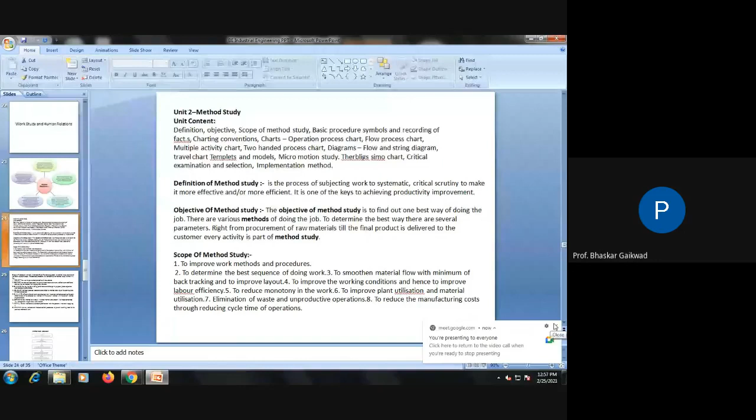Now unit number two. This is part of industrial engineering method study.

In this method study, the points contain definitions, objective, scope of method study, basic procedures, symbols, recordings, then charts. Different types of charts are there: operation process charts, flow process charts, multiple activity charts, and two diagrams - the flow diagram and string diagram. At the same time, there are travel charts, template models, and micro motion study.

In this micro motion study, Therbligs are the small activities shown by symbols, called Therbligs. The standard times for each motion are decided and shown on the SIMO charts. Then critical examination, selection and implementation of this method.

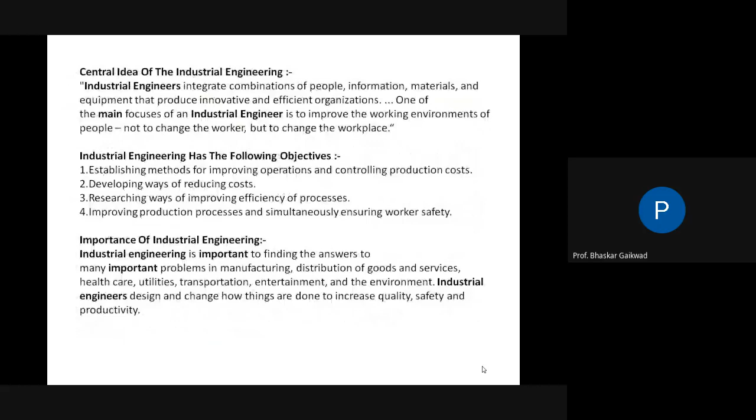So let us go through the revision of this, and then we will go to the next unit, that is method study. So in the last two, three lectures...

We have gone through the introduction to industrial engineering - what is actually industrial engineering, its definition, concept, the main objective of industrial engineering, and the contributions of F.W. Taylor and F. Gilbreth, scientists.

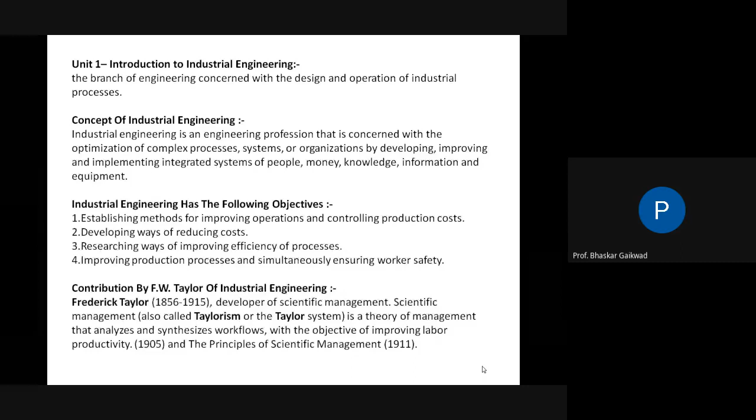If you consider all these points, this is related to improvement in production and productivity, and new development of the method study by reducing cost. So this is actually the core concept related to industrial engineering.

While developing this industrial engineering, two scientists, F. Gilbreth and F.W. Taylor, gave their contributions. F.W. Taylor's contribution is related to time study, and Gilbreth's is related to motion study.

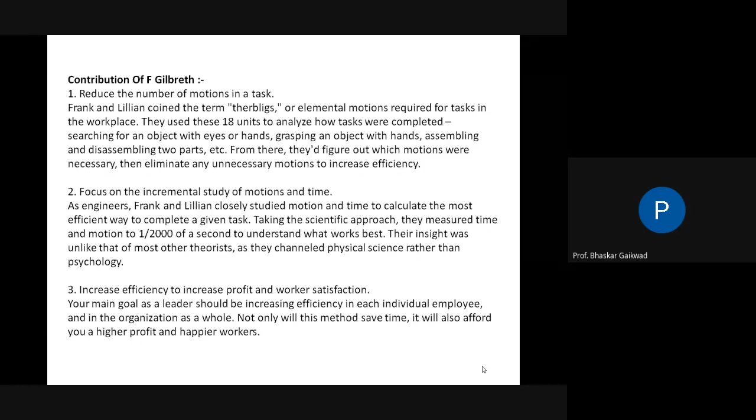Next, what is actually the difference between production and productivity? Then productivity factors, which are the factors related to productivity, we have discussed. Then after that, how to improve productivity.

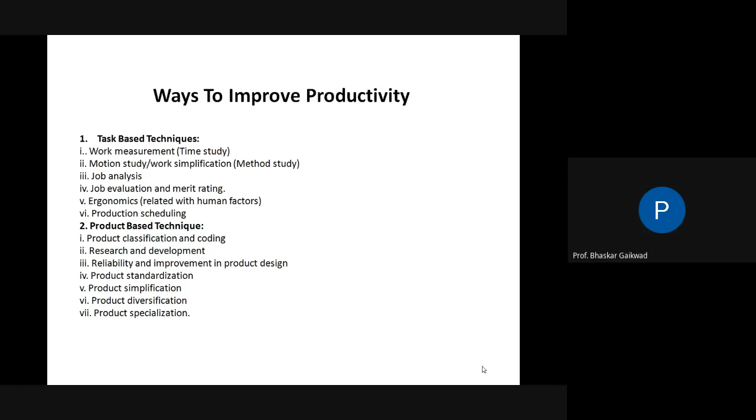There are a number of points. Task based technique means the whole of our syllabus of industrial engineering. Product based techniques may include classification, codification, design, research and development, simplification, standardization. So these product related things are there.

Technology - manually, whatever things are there in industry need to develop, we automate by using computers. Here computer aided design is there, manufacturing is there, integrated manufacturing system is there, group technology is there.

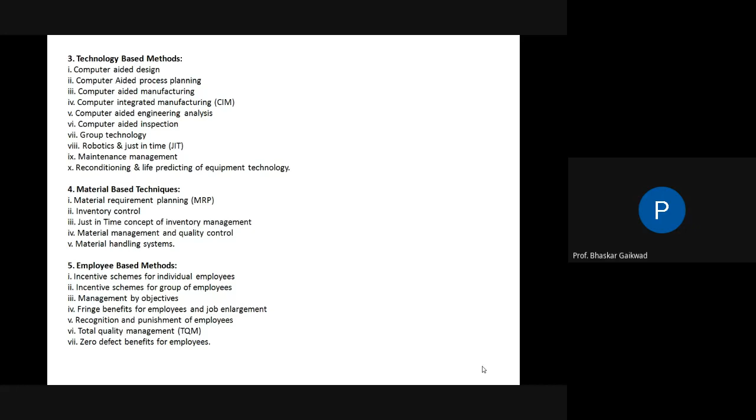Then the reconditioning maintenance part is there, and the huge cost related to materials, that is material management techniques. This is also part of improvement in productivity. Employees and employers having good relations related to the facility of employers will definitely increase productivity.

Then we came across work study - what is actually work study? This is part of the two, work study. It is actually a generic term for those techniques particularly used in method study and work measurements.

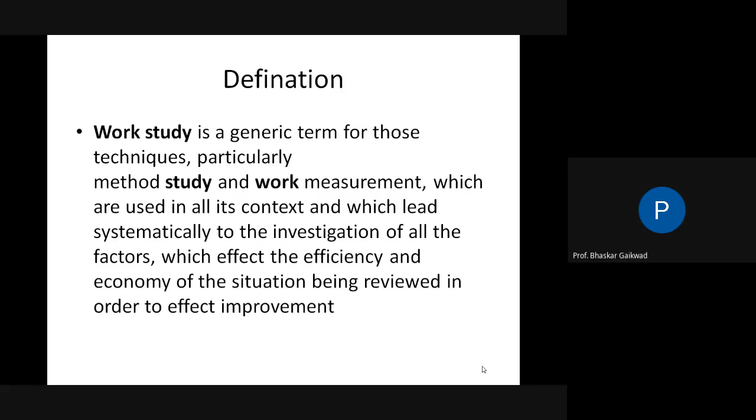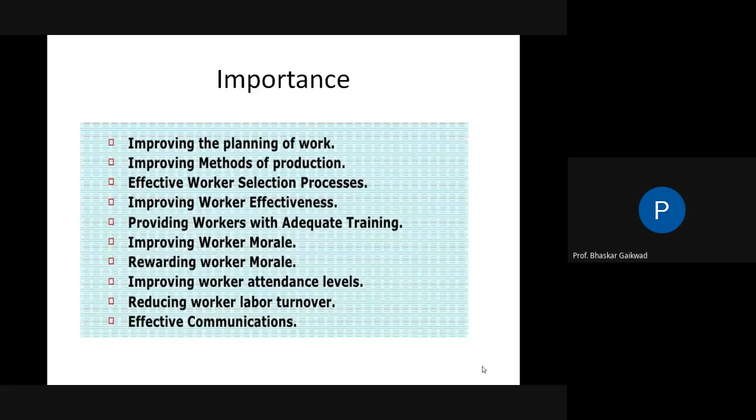So what is the objective of work study? Ultimately you have to consider how to increase productivity. All these points get covered under this. Then importance - what is the importance? The effective utilization of all resources. This is the importance of this.

And what is the procedure for work study? Select the particular work. Last time I gave examples in foundry, forging industry, or any forming industry - you can select any work related area, record this ongoing process, critical examination of this process, develop the new process.

Develop and evaluate that process, meaning cost estimations, then develop that process. We have to install that new process and maintain this new process. This is actually the work study procedure.

Then work study with simplification means we have to make all these works in a simple manner - if two, three components are there, you manufacture easily and achieve better utilization of man, material, and machines to achieve these targets. If critical works are there, you can split them into small elements, delete unnecessary elements, and go for rearrangement.

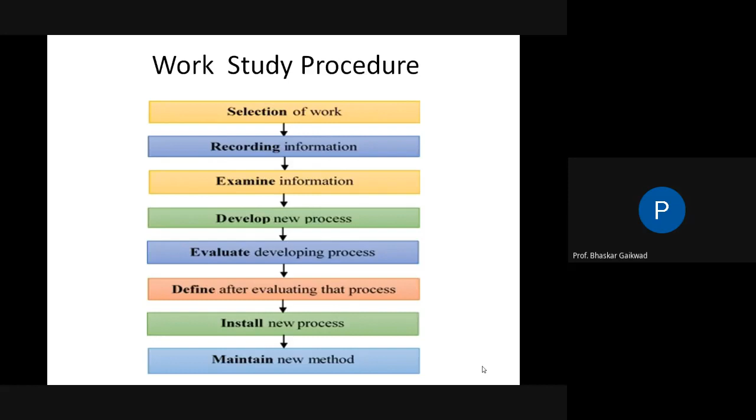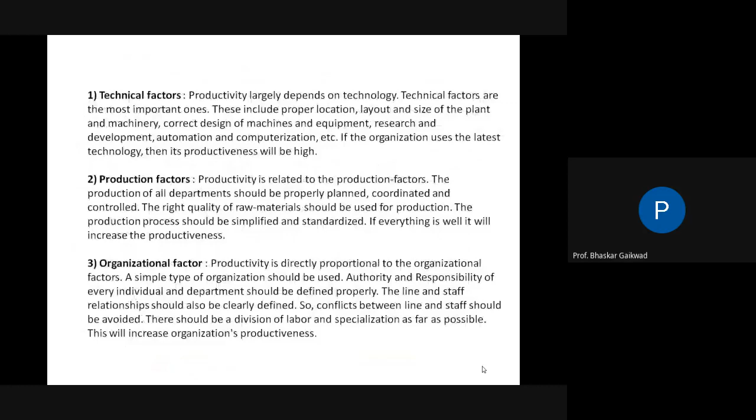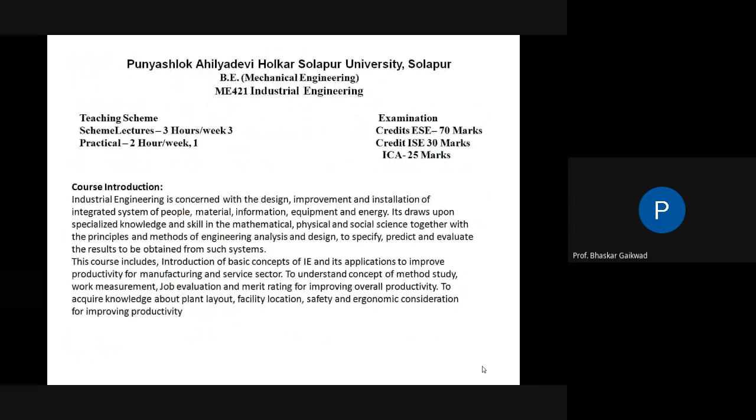So here's our first figure related to work study, already I have given. Let me go back and show you. This is the actual work study process, correct? Selection of the work, recording what is going on, examinations, develop new methods, evaluate new methods, set that new method, and continue or maintain. So the same process we will have to go for method study.

So first point, select the work to be studied and define its boundaries. For example, in our production centers, if you want to study about the methods, then you can concentrate on the production center. Select the job - which job is being manufactured in our production centers, that is the gear blank. So first you can study about the drawing, then make the program as per the dimensions.

Study about the geometrical and dimensional tolerance. After this, you can make the program, feed this program into the machine. Then we hold the raw material in the chuck of the CNC machine, make it zero, and start the machine. The cycle time will start, and within a few minutes the job will get completed. So here your selected job is for study.

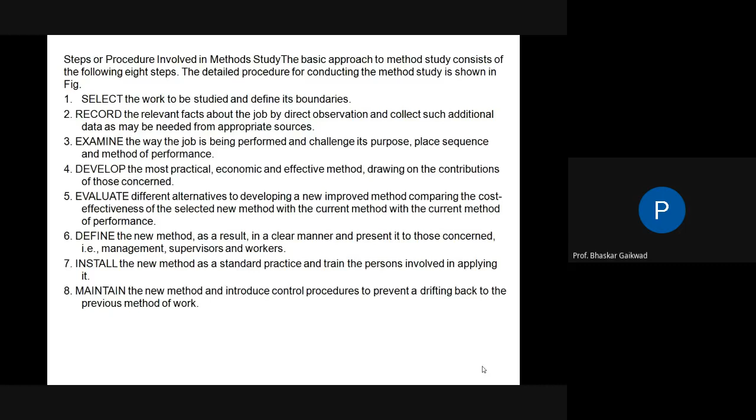So whenever you will be in industry, first of all you can think about the present method and how to improve it, so that cost will get reduced, efficiency will get increased, better performance, better production, and better productivity. Okay, so this is about the procedures.

Then here by charts I have given these procedures: select, record, examine, develop, evaluate, define, install, and maintain. By these charts, we can make use of this knowledge while using these method study principles on the shop floor.

Okay, in big industry, they are manufacturing any component, and if you study about the process, so many processes are there. Rolling process is there to make that cover.

Within this process, you have to study where is actually the critical place where we have to concentrate, so that a new thing will be developed, and this new thing is applicable to that industry from the cost point of view, production point of view, productivity point of view, efficiency point of view, effectiveness point of view, and performance of the workers point of view.

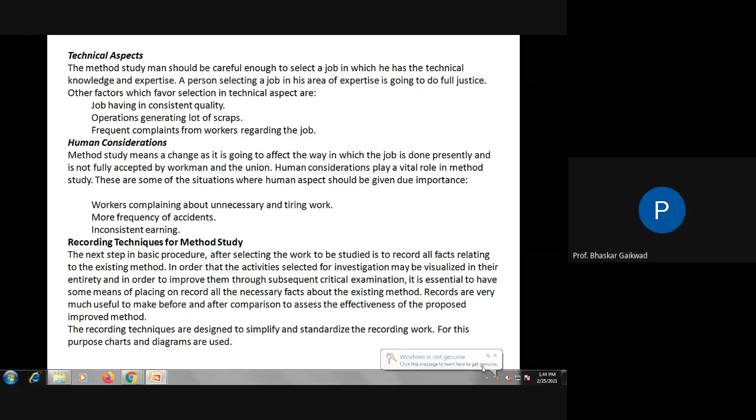So this is the methods and techniques by charts. I have shown these recording techniques. So how many charts are there? You can study this - how many charts are there.

Here two diagrams are there: one is the string diagram and second is the flow diagram. A string diagram is used for movement of the worker or movement of material from the stores to the manufacturing unit - this is the movement. A flow diagram means, while processing any component, in which way the component is moving from one process to the other, so that we can reduce the related cost, meaning transportation cost. These two charts help us reduce transportation cost - both are related to unnecessary movement.

So what is that flow chart? What is this string diagram? We are going to study that with some examples after completing a certain part of this chapter.

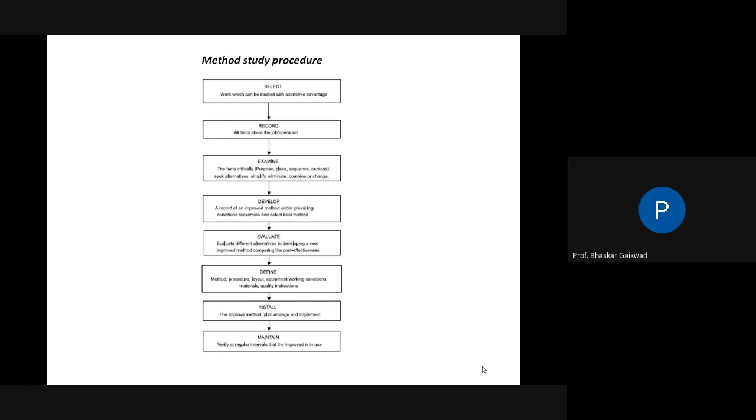So this is about the recording techniques for method study. Step by step we have gone through this. First point: select. Second point: recording. While selecting the jobs, which points you have to remember, then the recording techniques you have to remember for method study. So up to here it is clear. Anybody having any problems, you can ask.

Method study - it is the study of the present works and developing new methods in order to reduce the cost, increase the production and productivity. But this is a systematic, logical way. We have to remove unnecessary motions, unnecessary operations, transportation cost, things like this. So up to here it is clear.

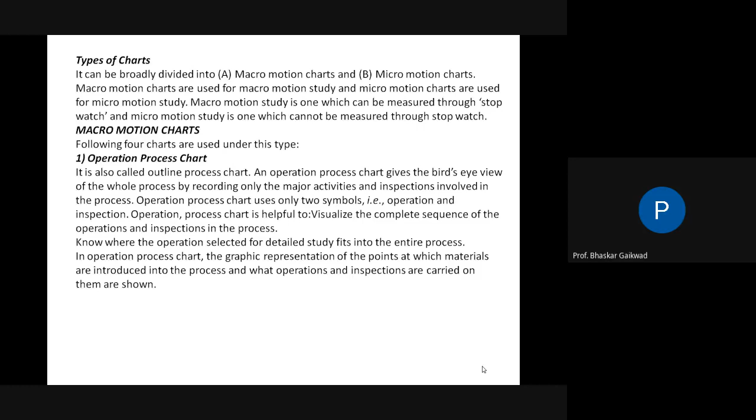Next time we're going to study about the different types of charts used in macro motion chart. First we'll go to the operation charts, and after this we go to flow process charts. So these are the flow process charts.

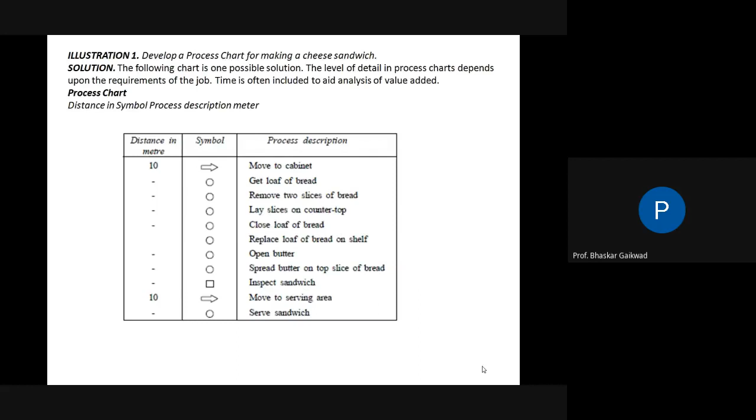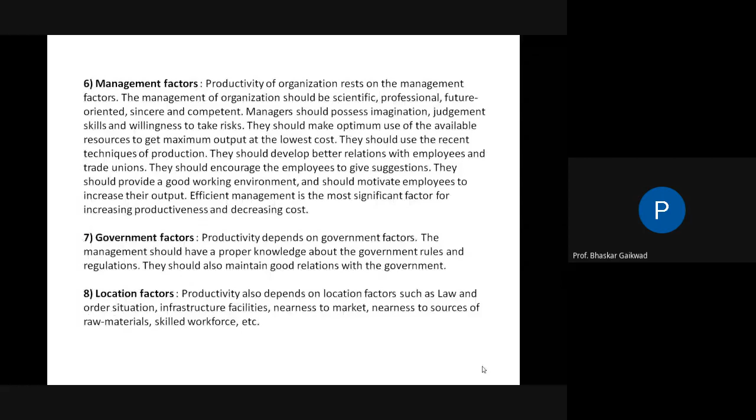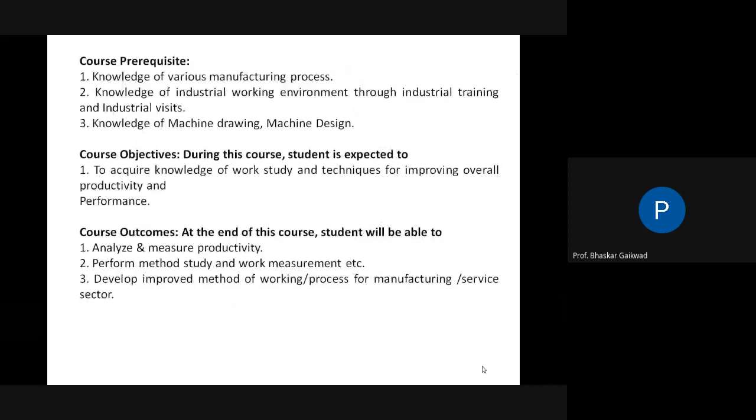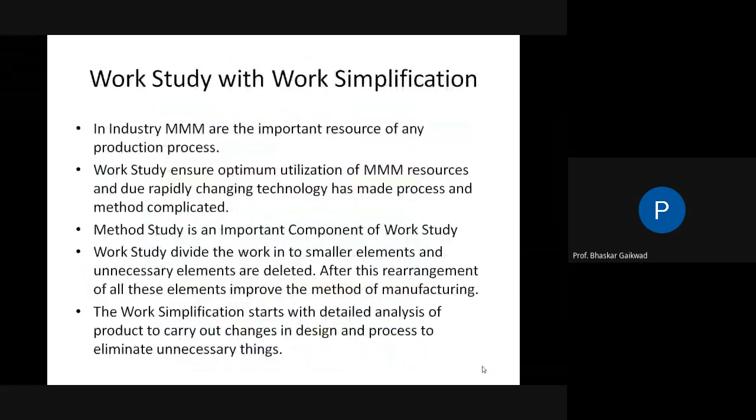So once again, the sequence of our study - I will show those who were absent for the previous lectures. You can remember this is our syllabus first section. The second section, still we have not gone through the procedures up to methods for the second chapter. So if anybody having any questions, you can ask.